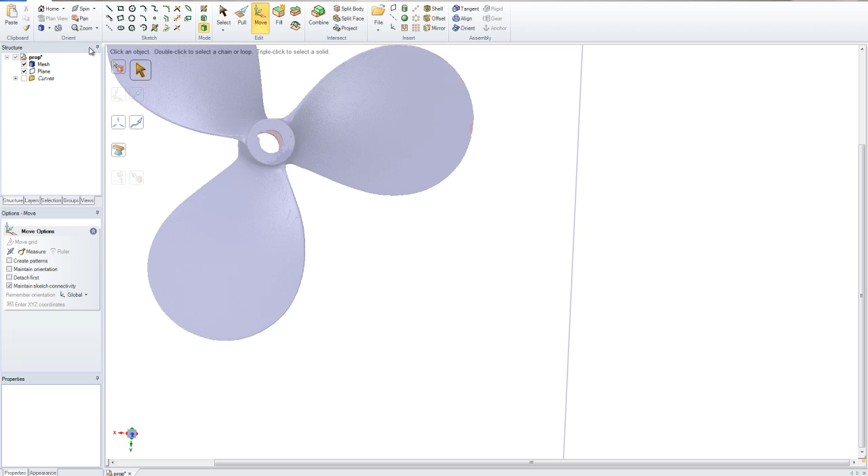So to move it, we'll simply come in, press move, select our mesh, and now I'm going to use this ball and I'm going to translate this ball all the way out onto the corner of this part because that's where I want my coordinate system to be. You may want it to be somewhere in a different area. This is just my preference for now.

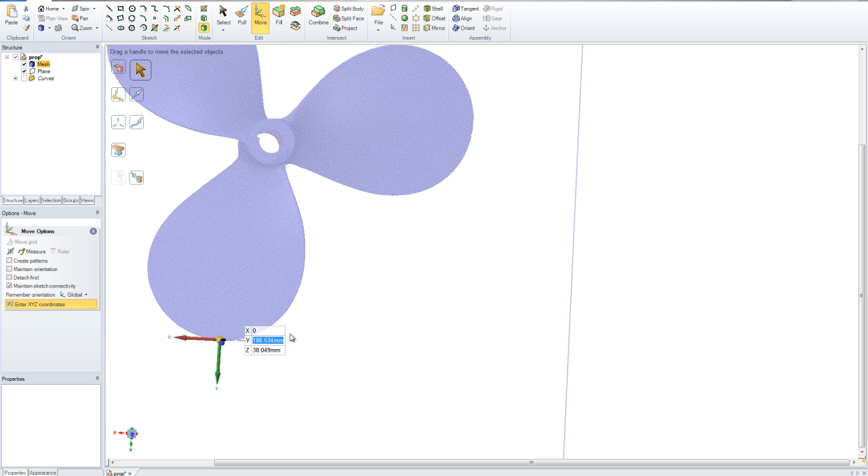So what we're going to do first is, because I have that sitting there, we're going to translate this to our 0, 0, 0. So our X, Y, and Z is all 0. So now we've moved this specifically to our 0, 0, 0 origin on our coordinate system.

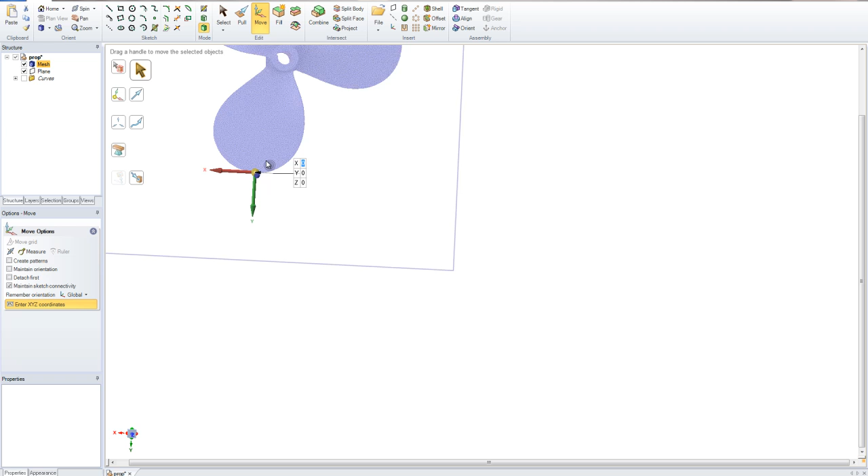And we also have our X positive facing in this direction and our Y positive facing down in this direction. Say we want to move that also. So what we can do is, there's a few different ways we can translate it.

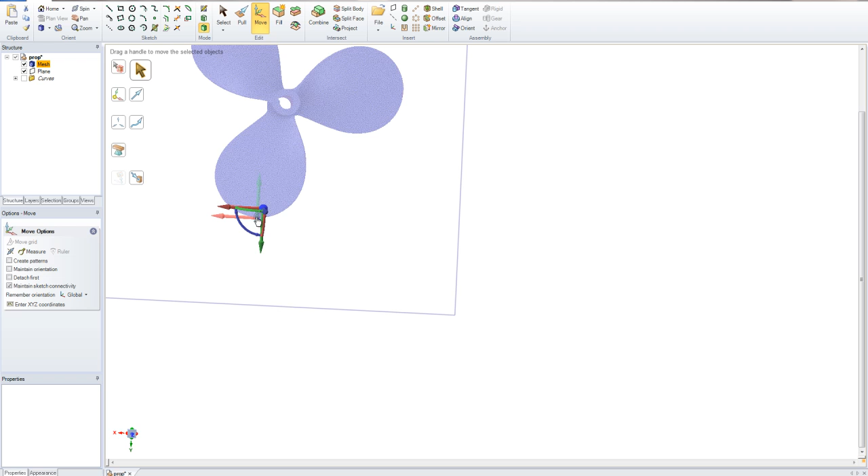But again, if we have this out at the corner, now that we've already moved all the way out to our 0, 0, all we have to do is translate this, let's say 180 degrees. Okay, so now our X positive is in this direction, our Y positive is in this direction, which we can see by our coordinate system indicated down here in the bottom left hand corner of SpaceClaim.

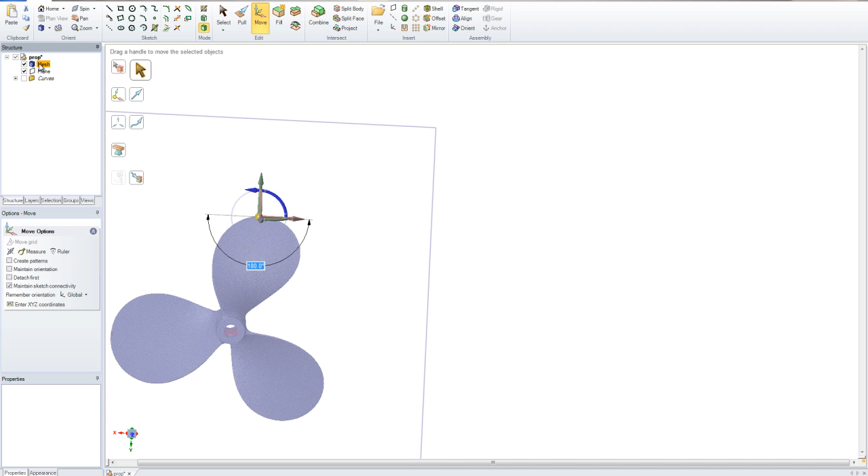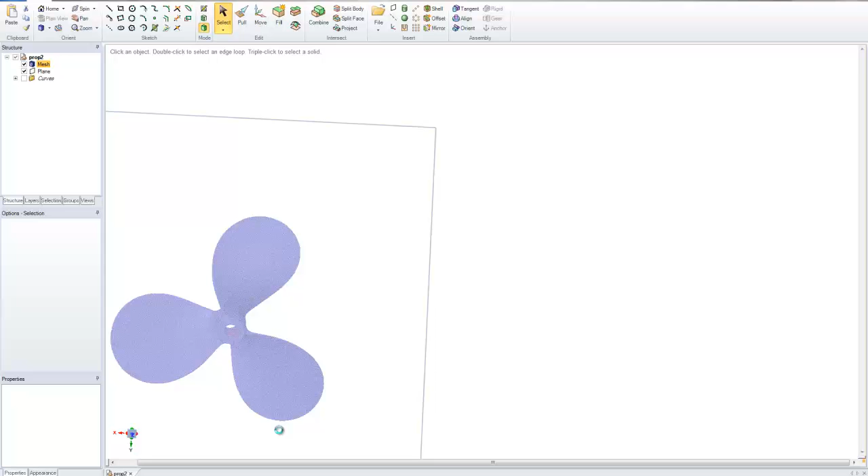From here, we'll go ahead and get out of this function, and we will save this off as an STL mesh. So we're going to call this prop2. Okay, so we're also going to change this to an STL file so we can read this directly inside of Geomagic fairly easily. We'll let it export out, and then once we've done this, we'll take a look at the model inside of Geomagic to see the translation.

Okay, so we'll grab Geomagic and we'll import prop2 STL. Okay, so once we do this, we'll see it come in. And another thing to note is, while things have been a little laggy through this demonstration, we can also see that this original file was close to 6.5 million points, which is what we were working with directly inside of SpaceClaim, which is fairly impressive.

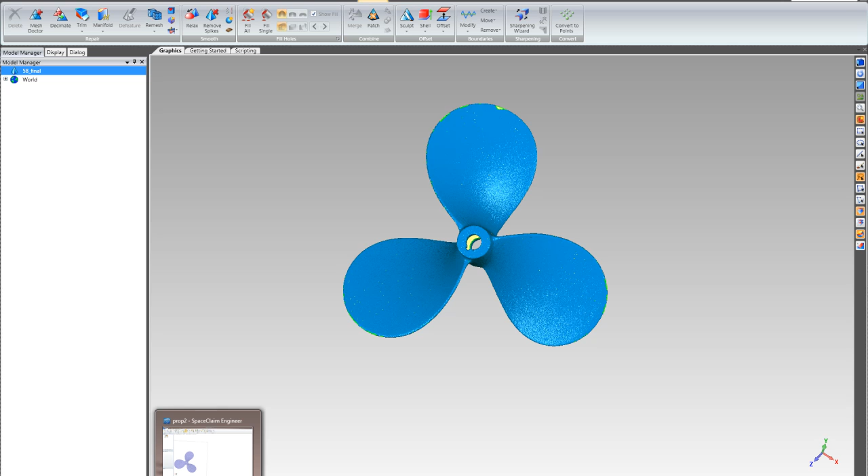While we did notice it was fairly laggy, we still have the capabilities to use quite a large number of triangulated mesh faces directly inside of SpaceClaim. So that's just one thing to note. Alright, now we'll go ahead and tell it no, we do not want to use Mesh Doctor.

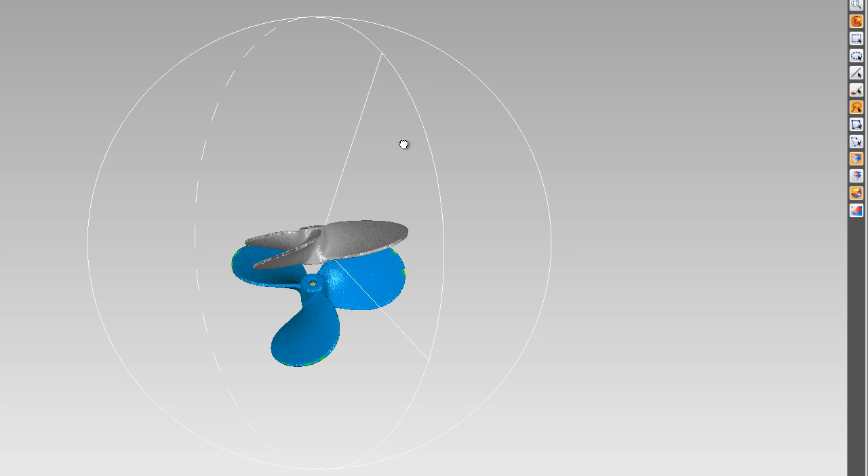And then if we look at our model, we can see, and it's a little difficult to tell, but our prop 2, which we can see over here, is now lined up directly with our coordinate system as opposed to the original file that was shifted off.